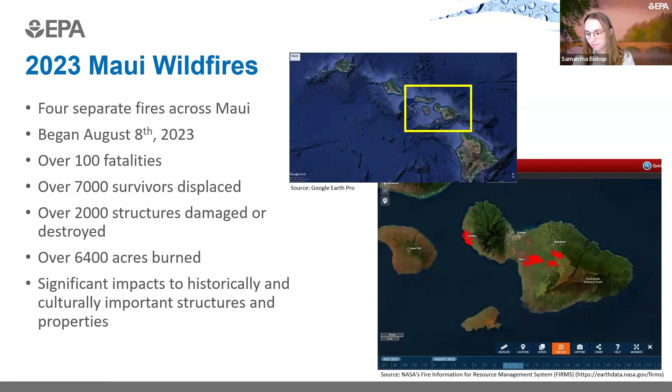The most pressing concern at the onset of the response was to assess the damage to the drinking water system. We suspected from experience with previous fires that damage could be extensive given the number of structures that were burned, and a systematic approach was immediately employed to assess the system, using a root cause analysis approach and starting where the water begins.

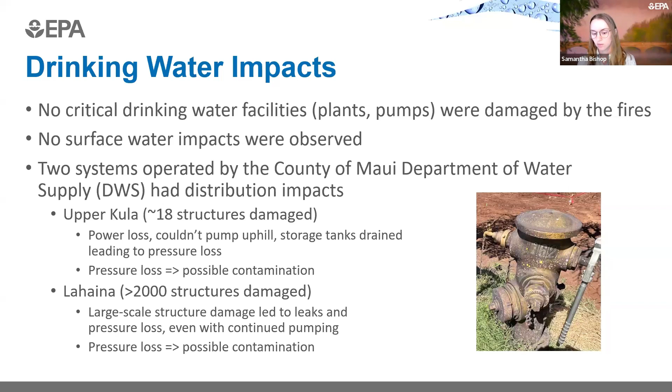But fortunately, the fires did not impact any major drinking water treatment infrastructure or water sources. However, distribution impacts were observed at both damaged water systems in Upper Kula, where there are 18 structures damaged, and the water system in Lahaina, where over 2,000 structures were damaged. Both systems also experienced pressure loss and therefore possible contamination.

The Department of Water Supply responded efficiently and immediately by isolating and repressurizing the system where they were not leaking water. A few highly impactful actions happened in the early days that are worth highlighting. The County of Maui Department of Water Supply issued an unsafe water advisory for parts of Lahaina and Upper Kula on the 11th as a precautionary measure.

DWS also provided water buffaloes that are pictured here, and they immediately removed all meters to disconnect the properties from the service laterals and began sampling. Initial sampling locations included the entry point to the distribution system, again, kind of starting where the water starts, and service mains to determine the location of any contamination across the distribution system. DWS sampled at hydrants and standpipes near the burn structures, and sampling also occurred at service connections of burn structures to determine if there's any potential contamination for rebuilding residents.

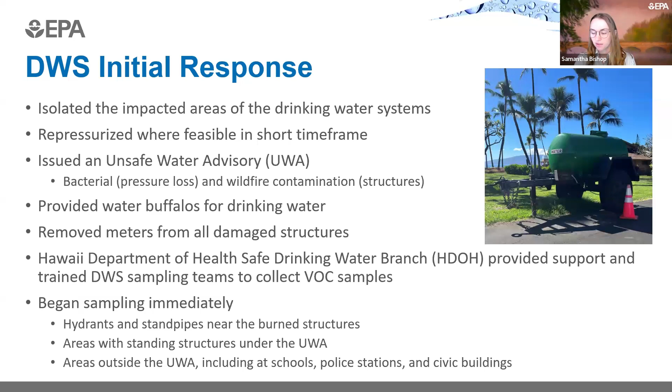The staff at Hawaii Department of Health were very involved throughout. They provided training and assistance, collecting samples alongside both DWS and EPA staff.

These maps you see show an overview of the Lahaina and Upper Kula drinking water systems under the unsafe water advisory. On the left map is Lahaina. It's subdivided in this image into the hydraulically isolatable areas, and at the time of this screen capture, it was colored orange to indicate that most of these areas were under an unsafe water advisory. The center is the larger map of Maui, so you can see in the northwest corner, that's the Lahaina area, and in central Maui, that's Upper Kula. The rightmost map is zooming in on Upper Kula, where you can see in this screenshot the areas that had an unsafe water advisory lifted, and that's why they were colored green.

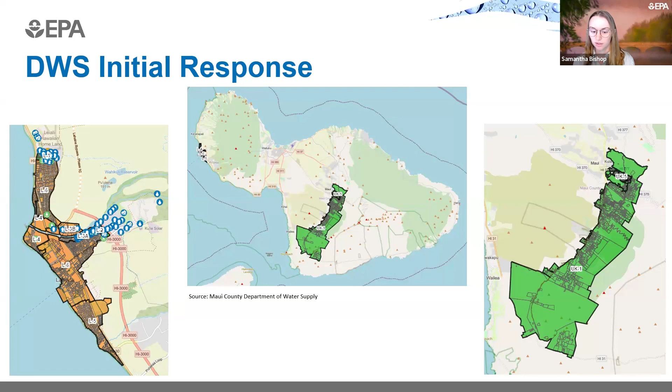After the initial effort, Department of Water Supply took steps to recover the system. They strategically closed valves to hydraulically isolate areas to ensure areas could be sampled with a cascading approach. In this way, once an area was sampled and confirmed unimpacted, only known water quality was then entering the area. DWS also skillfully employed the use of an overland bypass to connect two of those minimally impacted areas with a low number of burn structures or no burn structures that would have otherwise been connected in the water system through an area with many burn structures. This allowed them to essentially hydraulically isolate and assess these areas, and they also opened small areas slowly to identify open lines and leaks and flush the areas sufficiently.

From the beginning, they also developed a flow chart and a sampling and analysis plan to guide the effort in a logical fashion. This was a tall order in the first days of the response. A sampling and analysis plan should identify target contaminants, sample collection protocols, sampling locations. It should have aspects of data quality and management, and the plan should account for a potentially large number of samples that could be collected over an extended period, possibly months, a year, depending on the extent of fire damage and if contamination is found.

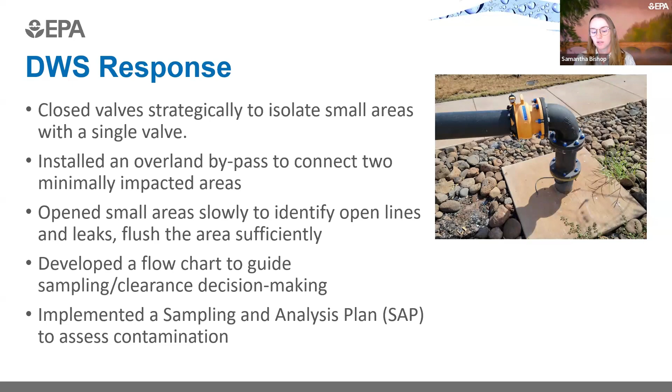They also had to account for the wide range of scenarios encountered in each of those hydraulically isolatable areas. So pressure loss, no pressure loss, damaged structures, no damaged structures. Could it be hydraulically isolated or not? And assess the scenario of each isolated area, proceed with a sampling plan based on that scenario. These conditions all factored into where and how they sampled, and eventually the requirements to lift the unsafe water advisory. After the initial sampling effort, the Department of Water Supply got that sampling and analysis plan approved to guide the effort for the remainder of the year.

The protocol for sample collection was critical for determining the presence and extent of contamination. The sampling efforts included chlorine and total coliform testing. These helped determine if the pressure loss impacted the system and if contaminants were present, as well as testing for VOCs and SVOCs to ascertain potential damage from the fire. The Department of Water Supply proceeded with multiple rounds of sampling for the mains around the distribution system, and this helps determine if potential contamination was localized or systemic.

For the service lateral sampling, and this is around the distribution system, at damaged structures, because VOCs can leach out of some materials over time, a period of stagnation was incorporated into the sampling protocol. DWS chose a conservative stagnation period of 72 hours, and this long period sort of allows for larger quantities of contaminants to potentially enter the water, thus increasing the likelihood of detection during analysis and potentially providing greater confidence in the results. We also found it was very important that samples be collected by individuals who'd been properly trained on the sampling protocol, and QA/QC and chain of custody all played critical roles in the response.

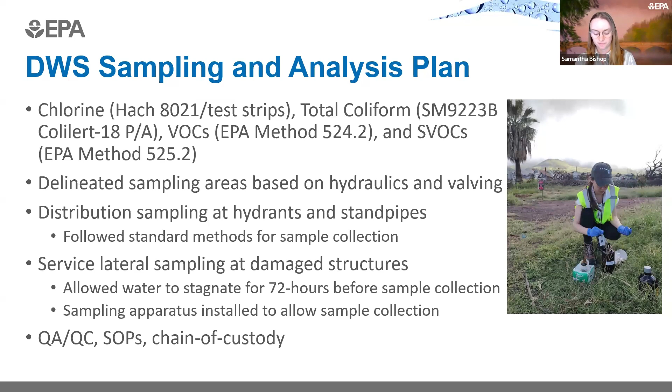So we know we had that stagnation period, they had that sampling plan, but what was contamination? The Department of Water Supply chose to use the lowest possible standard for contamination, considering contamination anything above detection, even if it was below the MCL.

Built into the sampling plan were a series of possible corrective actions depending on where a detect was found. So these could include flushing water mains and/or replacing hydrants, resampling for the distribution system, or isolating or replacing service laterals. In some small cases, there were capital improvements that we could hydraulically isolate, so no sampling was conducted in these locations. But in general, that was the process that was followed in the sampling and analysis plan.

I'm now going to hand it over to my colleague, Bill Platten, to talk about how EPA integrated into this response. At the beginning of the response, EPA got involved almost immediately through the Region 9 Water Division. They began providing support to the Department of Health, Safe Drinking Water Branch, as well as the county. From my part, from the Office of Water, we support all the regional offices in these kinds of circumstances, and I joined in with Region 9's effort when they started to provide support.

A couple of days after EPA got involved through the region, FEMA issued a mission assignment to EPA under ESF3 Public Works and Engineering to support water and wastewater with preliminary damage assessments and technical assistance. EPA staff advised the Department of Health and the county on impacts from the wildfire response, sampling procedures, the sampling plan development, and on communications with the public.

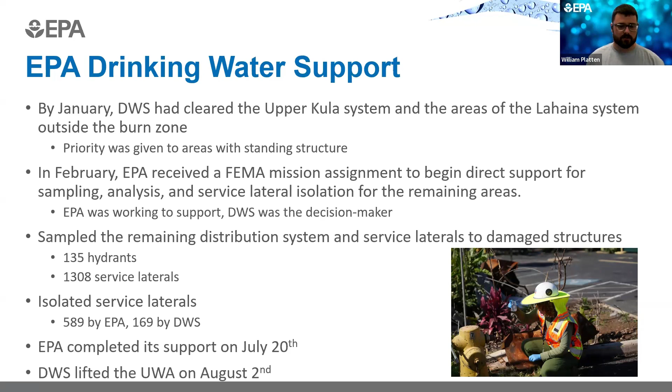The county also would make individual decisions about certain areas that they wanted to expedite getting clearance for. And so in some cases, even without sampling, they just made decisions to isolate those properties from the rest of the distribution system. Sampling did take a little bit of time, and in some cases that expedience was more important. So in total, EPA completed its support at the end of July, and the county was able to lift the unsafe water advisory for the remainder of Lahaina on August 2nd.

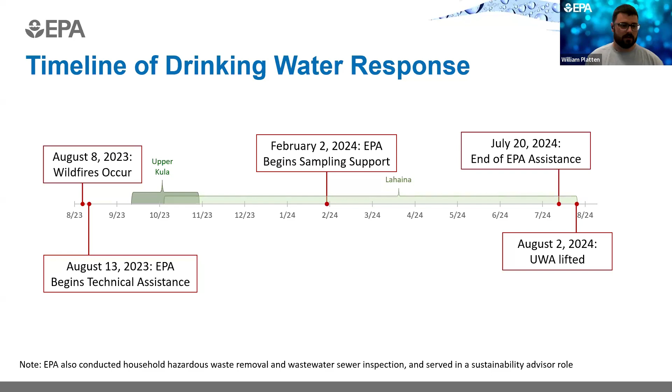This is an overall timeline of the response for the drinking water. The county was able to start clearing areas about a month and a half into the incident in September, and they finished that just before November. In Upper Kula and Lahaina, they were able to start clearing areas in October and completed all of Lahaina in August. And I also want to point out here that this is just a drinking water response. There were several other EPA actions going on for household hazardous waste, wastewater sewer inspection, and sustainability concurrent with all of this work.

So as you can imagine, we faced a number of challenges in implementing this response. First is just existing system conditions. The infrastructure was old. Things like valves didn't always work. Sometimes we'd go out and the valve would be turned and it wouldn't hold. The island's also water challenged overall.

There were two separate systems on different parts of the island that both required attention. They were about an hour and a half drive apart from each other, and you couldn't always send crews to both of them in a day to do the sampling. So it was a little bit of a logistics issue to get between them.

The systems themselves had very complex hydraulics due to the island topography, a lot of elevation change between points in the system, understanding how the water moved through the system. They used a number of service laterals or dual service laterals, where there was a single pipe leading to two properties. It would split and serve two separate meters. I'll talk a little bit more about that in a moment, but it led to complications with how to sample and collect representative samples for those lines.

And then there were a number of master meters that were feeding apartment complexes or HOAs that had their own distribution network on the property. Department of Health was very instrumental in facilitating communications with those property owners and building property managers to explain the circumstance. The county would go to the master meter and do the work that they needed to sample and test that line. And the state helped to explain the circumstances to the property managers and owners so that they could do what they needed to for their own premise plumbing system.

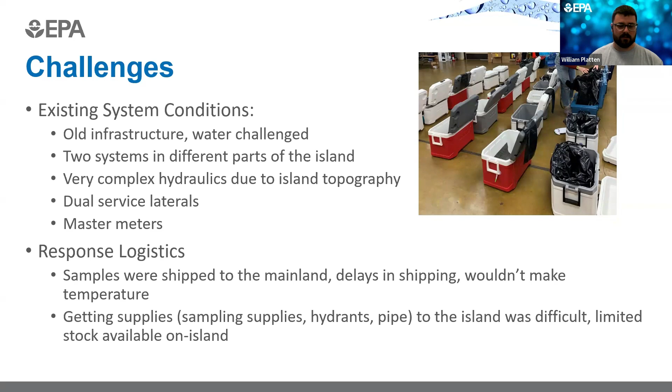There were also some staffing challenges. DWS has a small staff, and they're actually responsible for 12 total water systems in Maui. So they had 10 other systems that they were having to do regulatory sampling and maintenance for, and all the other things, while also trying to support the actions under the response. And it was very straining on them. EPA employees were coming in on 2.5 to 3-week rotations. And the changeover and all the new faces coming in required a lot of communication with the county staff on the island to make sure that they weren't missing communication or losing contact.

And then also we employed a number of cultural experts to help monitor the culturally sensitive areas with all of our field teams. That wasn't necessarily a staffing issue so much as we just had to incorporate them into our field teams and make sure that they were present with us during any field activities.

And there were a number of sampling challenges, identifying damaged structures. In Lahaina, there were a lot of multi-structure properties. So a property might be designated damaged and the front structure was still standing, but the back one wasn't, or vice versa. So working those issues was somewhat challenging. And then even on properties that were designated properly, locating the meters within the property was a challenge, having to go out and explore on the property to see where that meter was. Our GIS information wasn't always accurate for that, so it took quite a bit to find where the meters were for some properties.

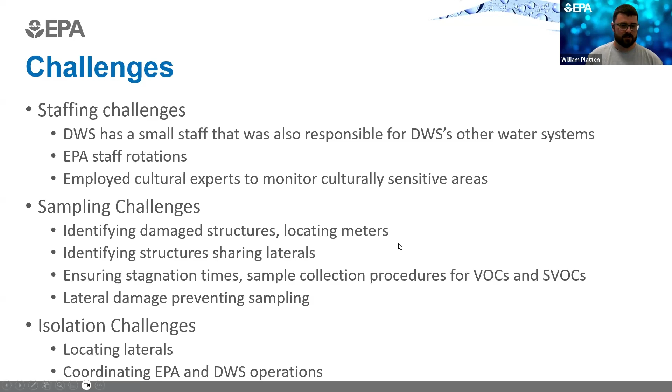This is a schematic and some images of the sampling apparatus and the dual lateral situation. You can see a single lateral fed two water meters, and initially samples were collected from both meters for VOCs, and then a single SVOC sample was collected. SVOCs are much larger volume than the VOCs, and so a single SVOC sample would be collected from the meters.

When it became clear that we couldn't always identify which of those meters were connected like this, eventually we decided to just do a VOC and SVOC from each meter. And in either scenario, if one of the meters was found to have contamination, the lateral would be isolated and both meters would be removed from the system, disconnected from the system.

Some of the images across the bottom, you can see these two meters are directly next to each other, a couple feet apart. Very obvious that those are connected. It wasn't always that easy. The apparatus would be installed. There's a couple of different configurations, and so the apparatus would have to be tailored to what kind of meter configuration it was.

We raised up the port for flushing. You can see there's a large diameter port on there for flushing the line prior to the stagnation period, and then a candy cane that came off the top for collecting the SVOC and VOC samples.

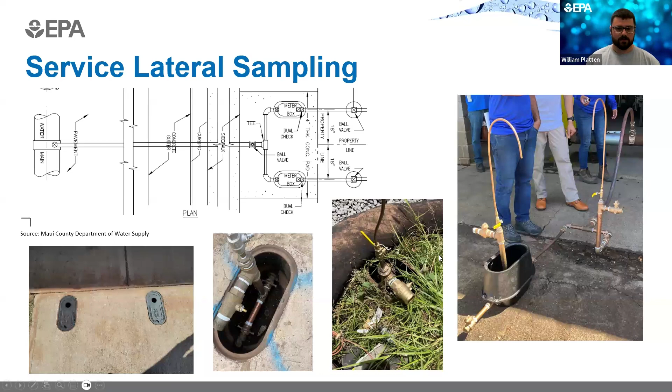For lateral isolation, these are 3 scenarios we encountered in the field, just to give a flavor of what we were seeing. The image on the left is a very shallow, small diameter line that fed a number of properties down a lane. There weren't any corp stops on this line, and so we ended up having to trace it all the way back to the water main on the cross street and isolate the entire lane from that point.

The middle image is an example of the coordination between EPA and Department of Water Supply. We went to isolate this line, found it next to a telephone pole, and it had been decided that anything that required some unique equipment that wasn't part of the standard stuff that our field teams had, the Department of Water Supply would come in and handle that. And so this one would be assigned to the county to complete.

And then on the right, this lateral came out and we excavated near where we thought it connects to the water main. Turns out that it turned right and went 50 feet to the right to another water main on a cross street. The water main that was on this street dead ended to the left of this image, about 75 feet away, and we did not realize that it would go that direction. So we had to do some exploring to find where it connected.

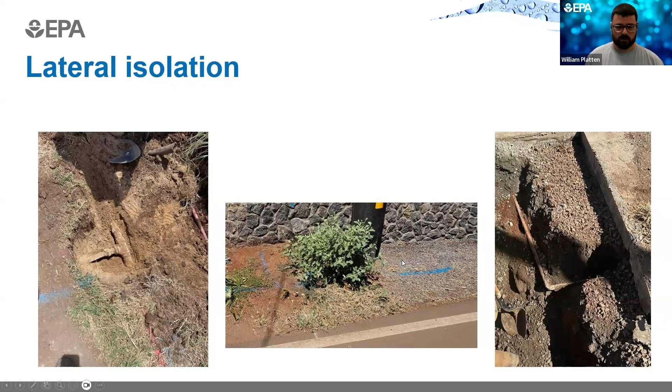Current status and what the future looks like. The town of Lahaina is still in recovery mode. They're still rebuilding. Same with the impacts in Upper Kula. So the county is doing long-term monitoring, still collecting some samples periodically to show that there's no more contamination in the system. They're operating the Lahaina system completely right now, but it has none of the water demand that it previously did. So they're having to take extra steps to ensure that the water quality is not degrading from no one using it.

Long term, they're going to start replacing service laterals and connecting in the water meters as the structures are rebuilt and complete all their capital improvement projects that they've designated. And EPA received a recovery mission assignment for continued technical assistance and will be continuing to work with the county as they go through their recovery.

Other things that have come out of this, we've shipped off some of the damaged hydrants to the EPA Office of Research and Development, who will start taking a look at them to see why some of the contamination was found. We'll also be conducting a larger meta-analysis of both Department of Water Supply's efforts and EPA's efforts, looking at contaminant occurrence, looking at the spatial and elevation differences and concentration ranges that we're seeing.

And there's a lot of field notes that were collected throughout the operation. And we need to go through and compile them and develop some lessons learned that we can share with the greater community.

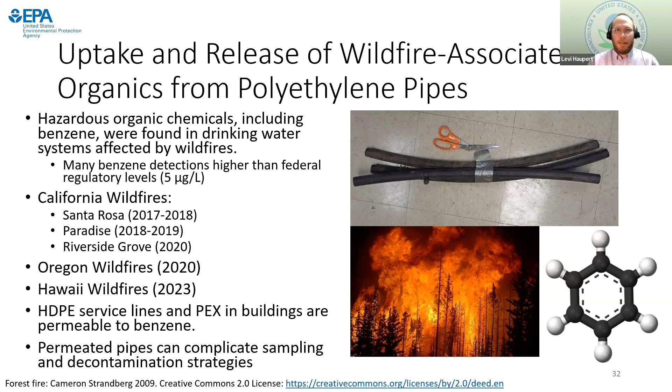And normally, historically, that has been of great interest for pipes that are, for instance, buried next to leaking underground storage tanks. But it can also be a problem when VOCs like benzene are introduced to drinking water systems through disasters like wildfires, or even spills or industrial backflow incidents. And I'm going to talk a little bit about some of the interesting behaviors that benzene has when it does interact with plastic pipes.

So when we're talking about something like benzene, and I'll use benzene as our example for most of the presentation, it can penetrate into the pipe walls. It doesn't just sit on the inner surface of a service line or PEX tubing in somebody's house. So since it can penetrate into the meat of the pipe, your plastic pipes that are exposed to benzene for a long time can act like sponges. They soak up the benzene and then can release it at a later time.

And one important thing to keep in mind is that benzene movement through plastic is not very fast compared to the time scale of some remediation and sampling activities. It only takes a couple minutes or seconds to flush water out of a pipe, but for a benzene molecule to pass from the inner surface of a pipe to the outer skin of a pipe is a days or weeks long process.

So you can end up in a situation where, for instance, a contamination is identified and pipes are immediately flushed to remove contaminated water. And then if a sample is taken immediately after that, it might come up a non-detect because the benzene or whatever contaminants are in the pipe didn't have time to leach back to the inner surface of the pipe to be released into water. And you might end up with recurring benzene hits in sites that have already been flushed or thought to be decontaminated.

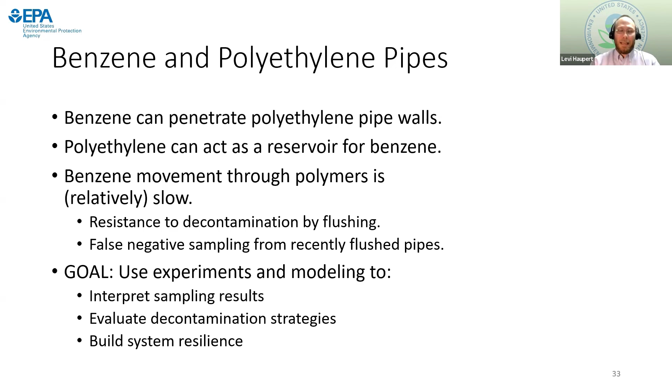So now that we know generally what the behaviors are and why we're concerned about it, we at ORD wanted to try to put numbers to that. How do we quantify that? How much benzene comes out? How fast? So we wanted to use experiments to develop a model to help inform response actions, like how do we interpret some of our sampling results, and how can we design a decontamination project if that's the route that we choose to go.

So actually, before the wildfires became an issue, Matthew Magnuson and I developed a permeation model for stagnant drinking water pipes. We were interested in looking at responses to oil spills or industrial backflow incidents. In fact, fairly recently, there was an industrial incident where some factory, I think in Texas, accidentally pumped some benzene back out into the drinking water system, and some homes were contaminated. So we developed a model that looks at the uptake and release in stagnant pipes.

And stagnant pipes are pretty understudied from a modeling standpoint. The literature before this was mostly concerned with flowing water pipes, like water mains that are next to gas stations or underground storage tanks. So we developed a model to look at stagnant pipes that don't have flow in them all the time, such as you would find in a building water system, or maybe even in service lines in wildfire affected areas, immediately after response and recovery from wildfires, where people aren't using water all the time.

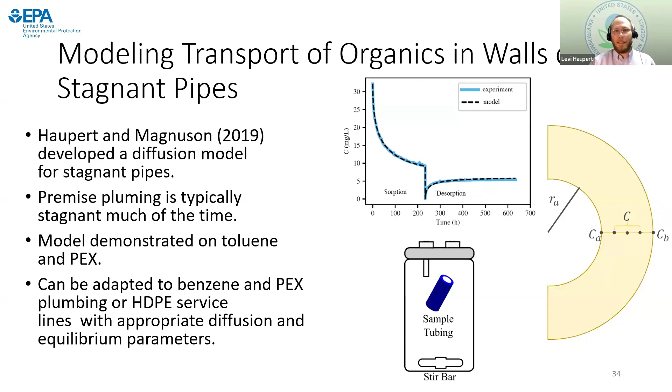And we tested and vetted this model on some model compounds in cross-linked polyethylene. And then we looked for ways to make it more applicable for common wildfire-associated incidents. So we also tested this on HDPE and benzene. How we tested this at our testing and evaluation facility in Cincinnati is that we took some segments of drinking water pipe, filled them up with a contaminant solution containing significant amounts of benzene. And we've also done this for some of the other wildfire-associated contaminants.

You seal both ends of the pipes and leave it sit with the contaminant solution inside for a couple weeks. This particular example is for 2 weeks, which is something that might happen if during a wildfire response, the contaminated water gets into service lines or houses, and then while there's an evacuation, it just sits with the contaminated water inside. And then after the contamination period, we dumped the contaminated water out into a waste container and measured the amount of benzene in it. And then every day we did daily flushing and sampling of the pipe segments to observe the trends in the amount of benzene that leached out of the pipes.

And I have some results plotted here comparing a couple different pipe materials. The orange dots show our samples from high density polyethylene pipes that are commonly used in service lines. And one thing to note here is that the decrease in benzene concentrations with the daily flushes is not uniform, because we didn't flush the pipes on weekends or holidays. And so during those longer stagnation periods of 2 or 3 days, you can see that the benzene concentration that leached out is higher than the previous day. So that gives you an idea of how slow the leaching process is and how important it is to consider stagnation time when interpreting sampling results.

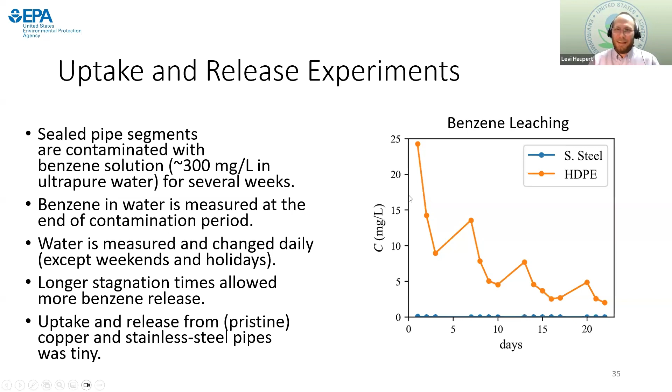And also, I'd like to draw attention to, we checked these against metal pipes. This example has stainless steel, but we also did copper, which is a really common material for service lines and premise plumbing. And at least pristine metal pipes didn't hold up nearly as much benzene; in fact, it was pretty much non-detectable compared to the polyethylene pipes.

We only had two adjustable parameters in our model, and they both have physical meaning. The first of them is the partition coefficient, which is a measure of relatively how strongly the contaminants absorb into the pipe material versus how much they want to be in the water. And then also the diffusion coefficient, which is a description of how quickly and how agile the contaminant molecules are, how quickly they can diffuse through the polymer chains in the pipe wall.

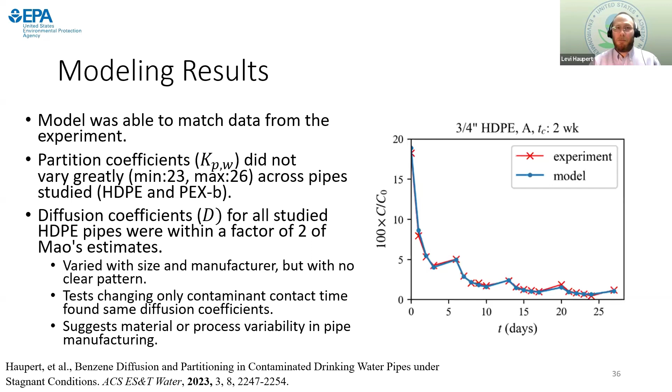We tested these. We fit a bunch of different pipe sizes from pipes of different materials and from different manufacturers. We looked at high-density polyethylenes and a couple of sets of PEX tubing and a couple of pipes taken from field sites to see how much variability we saw in these parameters. And there was some, but it actually wasn't all that much.

If you made predictions or you're interpreting your sampling or flushing performance based on, for instance, the wrong size pipe, within one standard size, or maybe you're wrong about which kind of polyethylene it is, it's probably not going to make a huge difference for this particular experiment.

So we think for stagnant water systems, this model and the parameters that we're publishing are actually fairly robust. But one potential caveat here is that we only looked at these at room temperature or on bench conditions. And premise plumbing in particular can have a pretty wide variation in water temperatures. For instance, in the wintertime, water coming in from the service line might be pretty cold. And on the other hand, water coming out of a water heater can be pretty hot.

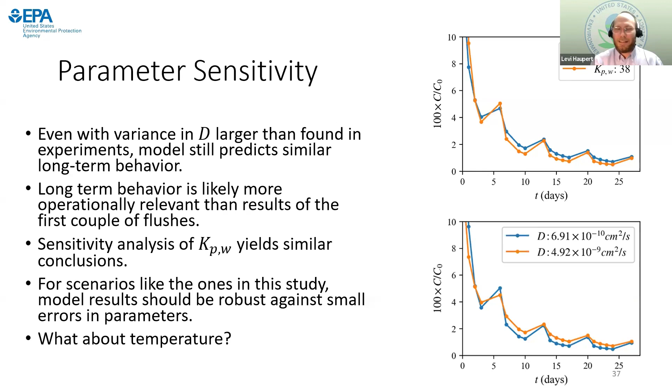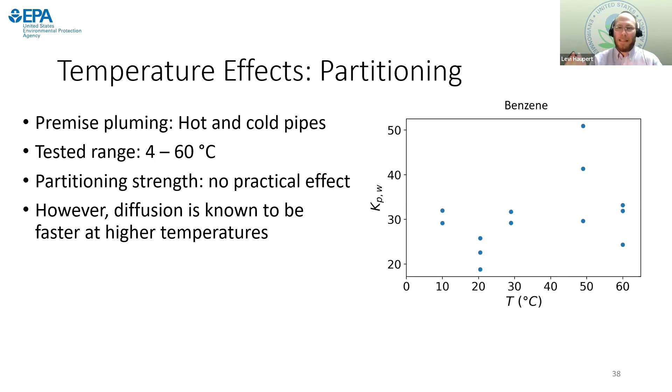The diffusion effect we expect to be more significant, because temperature affects how quickly all the molecules in the system are wiggling, and so how quickly benzene can pass through polymer chains. So we ran this contamination and decontamination scenario I mentioned previously at these different temperatures. And if you look at the difference in the decontamination curves, it's actually a little bit complex, because there are a couple of competing effects that the more rapid diffusion at higher temperatures causes.

You might initially expect there to be more benzene absorbed from the initial contamination, and there is. The pipe will take up more of the benzene in the initial contaminant solution during the contamination scenario. But as you can see, even the initial extractions at the really high temperatures are really low, which seems paradoxical because the pipe absorbed way more benzene. But that's because at high temperatures, benzene goes all the way through the pipe wall to the outer surface and starts evaporating more quickly. So there's another benzene loss mechanism.

And I think it would be interesting to explore some of the implications of that potential loss mechanism. If you get really big, seriously contaminated pipes in a house, for instance, are the hot water lines going to end up causing the basement to have benzene fumes in it? That would be an interesting thing to look at.

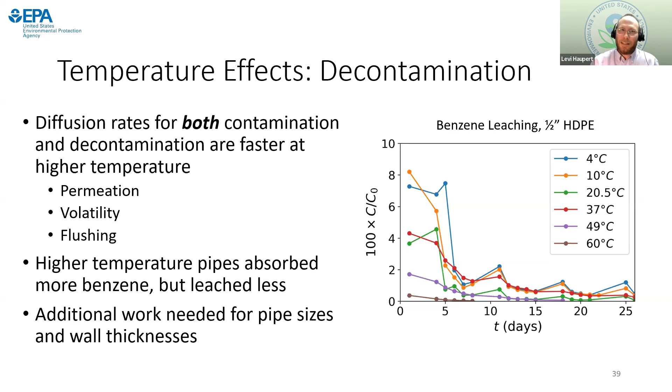So to sum up the modeling and diffusion in the plastic pipes, we have, I think, a pretty good handle now, at least for stagnant pipes in premise plumbing and service lines, on how undamaged plastic pipe that's in fairly good condition is going to behave. And we have parameters out there to help inform decon decisions and interpret sampling. But there are still some unanswered questions about the bigger picture of wildfire-associated contamination of pipes.

First off, where does the contamination come from during wildfires? Some studies have already ruled out releases from storage tanks or that kind of thing. The contaminant profile in most of these drinking water incidents doesn't match underground storage tanks or nearby industrial sources. So where's it coming from? Is it coming from destroyed infrastructure or from maybe burning biomass that gets drawn into the system if it's depressurized?

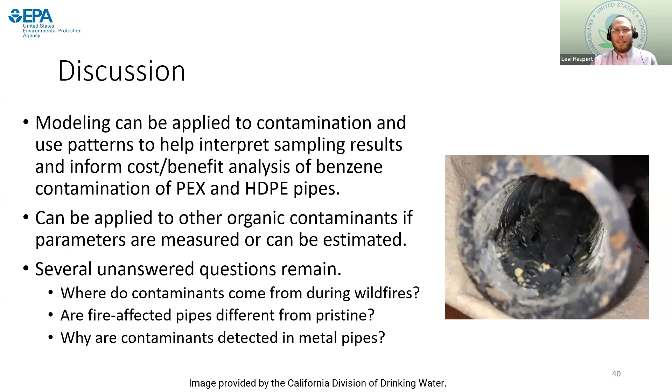And also, with the response that Bill and Samantha talked about, there are some places where there are recurrent VOC or contaminant detections from metal pipes rather than plastic ones. So what's happening there? We have a fairly new ongoing research project where we're looking at the effect of fire conditioning on drinking water pipes, what kind of contaminants get taken up into pipes from simulated wildfires, and how the change of condition of the pipes affects their uptake and release of these contaminants.

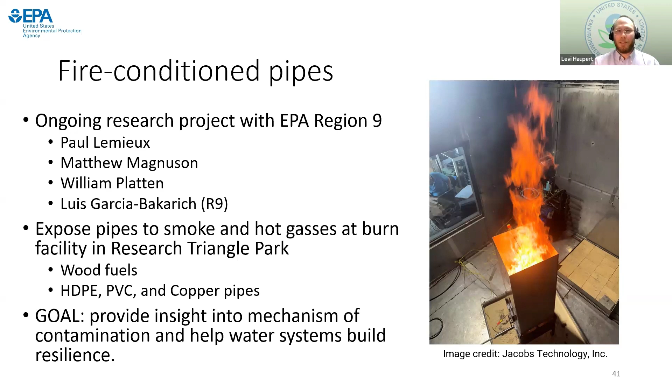To this end, we're doing this collaborative project with EPA's Region 9 and conditioning pipes at a burn facility at EPA's facility in Research Triangle Park, North Carolina, where we're taking some wood fuels, building a fire, and sending the hot gases and smoke through drinking water pipes to get some insight into the mechanism of contamination. The hope is that once we better understand why the contamination happens in the first place, we might be able to build better countermeasures to help systems build resilience.

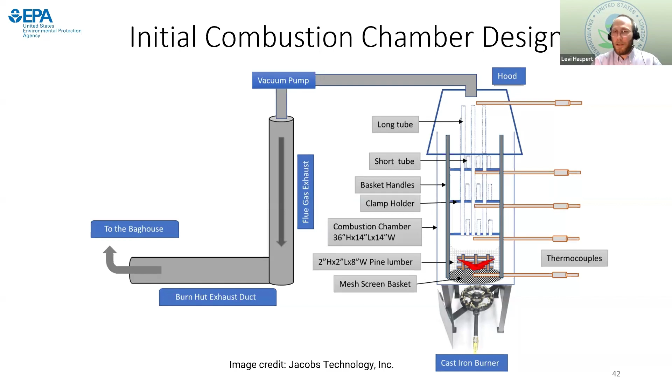And then we have sensors to measure contaminants in the exhaust of the system, where we can compare the contaminants found in the smoke with contaminants later extracted from pipe, to see if we can identify any that might be uniquely generated in some kinds of pipes.

We've had to do some work to tune how this system works, because if we make it so hot that we melt down the pipes completely, that might be interesting for what pipe conditions show up in fires, but we won't be able to do any decontamination experiments in the pipes, because realistically, if the pipe can't hold water, it's going to be replaced. So we had to tune the burner stack so that we don't melt the pipes completely or incinerate them.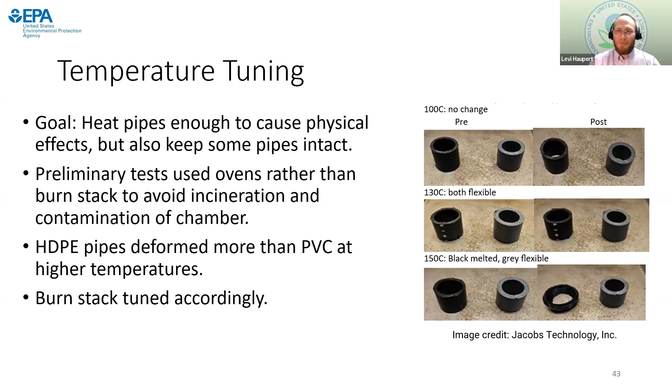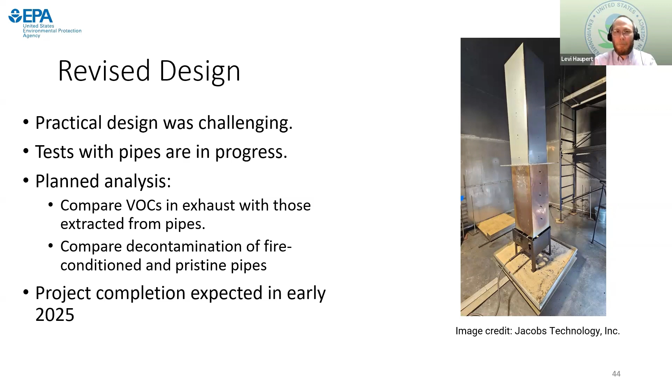So we have a revised design here. You can see this one's a little different from the first picture that I showed. It's got some extra height on it, and we've adjusted the fuel composition so that it's not sending flames all the way up the pipes. We've got a pretty good handle on this now, and we're expecting results from this project early next year.